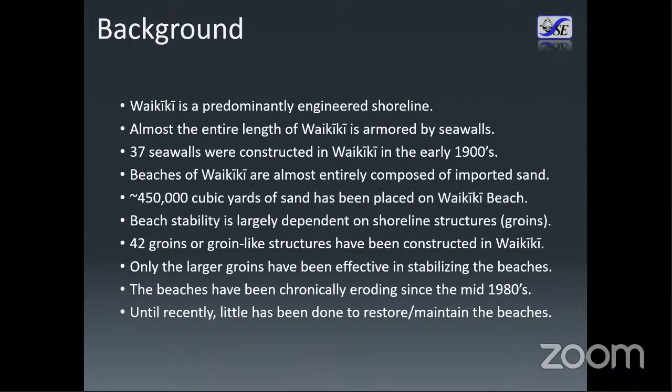Unfortunately, for the past 35 years or so, the beaches have mostly been experiencing chronic erosion, and until recently, just in the past 10 years or so, very little was being done to restore and maintain the beaches.

So this figure you see here is an overview slide of the beach sectors in Waikiki. The entire shoreline spans over 10,000 linear feet, or 2 miles of shoreline. And again, the individual sectors are compartmentalized by a series of groins to create 8 distinct littoral cells.

So beginning at the west end of the shoreline, let me use my cursor here, at the west end we begin with what we refer to as the Duke Kahanamoku beach sector. It spans approximately 1,100 feet of shoreline, extending from a rock rubble mound breakwater on the left, over to the Hilton Pier, which includes a groin that extends back into the beach.

That leads us to proceeding east to the Fort DeRussy beach sector, which extends from the Hilton Pier and groin about 1,680 feet to the Fort DeRussy outfall groin that's located right here.

The next cell to the east is referred to as the Halekulani beach sector, consisting of about 1,450 feet of shoreline that extends from the Fort DeRussy outfall groin on the west end to the Royal Hawaiian groin on the east end.

Continuing to the east is the Royal Hawaiian beach sector. Item D on the figure consists of approximately 1,730 feet of shoreline that extends from the Royal Hawaiian groin at the west end to the Ewa, or west groin, at Kuhio Beach Park.

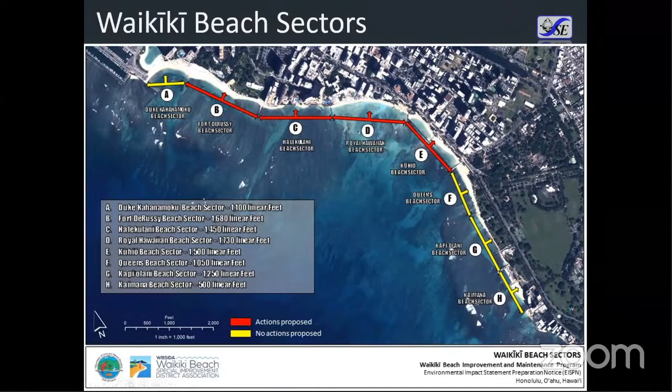As I previously mentioned, the beaches of Waikiki have been chronically eroding since the mid-1980s. In addition to the associated beach narrowing and beach loss, the erosion has caused a variety of other negative effects in Waikiki. The erosion and flooding has limited shoreline access, caused structural damage, and contributed to the overall deterioration of shoreline conditions along Waikiki.

The economic impacts of beach loss in Waikiki are tremendous and really can't be overstated. Without beach maintenance and improvements, the beaches of Waikiki could be completely lost to erosion by mid-century or sooner. Complete erosion of Waikiki Beach could result in an annual loss of over $2 billion in annual visitor expenditures, based on a study conducted in 2018.

So here are just a few photographs. I hope they're large enough for you folks to see that highlight some of the issues and the need for beach improvements and maintenance in Waikiki.

Photograph A is of the beach walkway in the Fort DeRussy beach sector. Erosion and sediment loss has caused significant beach narrowing at the east end of Fort DeRussy Beach. The beach walkway, constructed on top of a seawall built in 1916 that spans the entire length of the shoreline, is frequently overtopped by waves, particularly during high tide and high surf events. Periodic maintenance is required to push the sand back onto the beach.

In consultation with the Waikiki Beach Community Advisory Committee, it was determined that the highest priorities for beach improvement and maintenance actions in Waikiki are, in order: the Royal Hawaiian Beach sector, the Kuhio Beach sector, Halekulani Beach sector, and Fort DeRussy Beach sector.

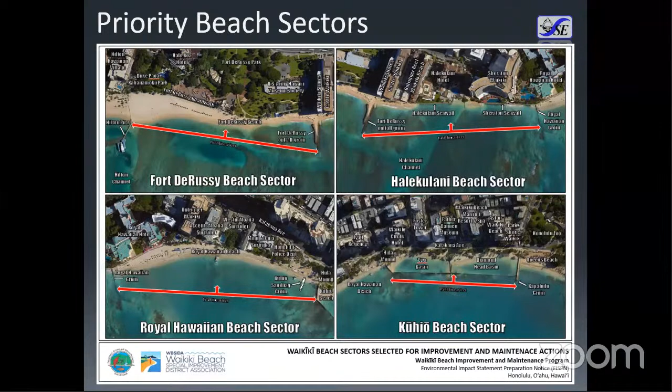The WBCAC also determined that of the options available to address these issues in these areas, beach restoration and maintenance were the preferred options.

The primary objectives of the proposed actions are to restore and improve Waikiki's public beaches, to increase beach stability through improvement and maintenance of shoreline structures, to provide safe access to and along the shoreline, and to increase resilience to coastal hazards and sea level rise.

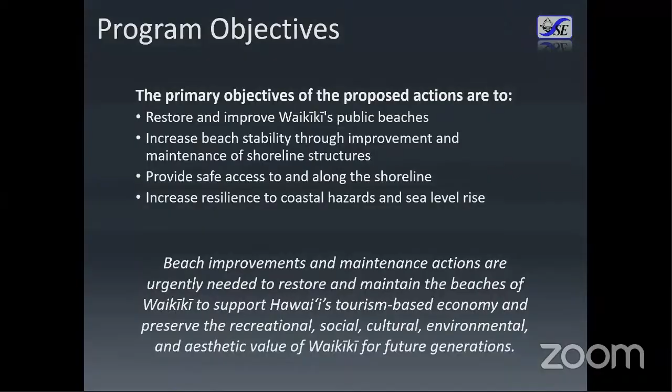The WBCAC also established criteria to guide the planning process for beach improvement and maintenance in Waikiki. The primary objectives of the program are to improve beach stability, improve lateral shoreline access, and increase resilience to sea level rise and coastal hazards.

The actions proposed are designed to accommodate sea level rise over the next 50 years and are also designed to be adaptable beyond that time. The actions would be implemented in phases with an emphasis on supporting the widest range of possible uses with the least amount of disruption.

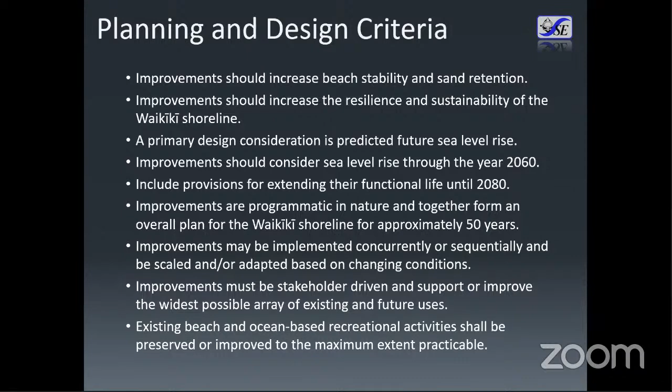I just want to go through a couple of slides to provide an overview of each of the beach sectors and highlight some of the issues and problems that we're trying to deal with through this program.

The Fort DeRussy Beach sector consists of approximately 1,680 feet of shoreline that extends from the Hilton Hawaiian Village Pier to the Fort DeRussy outfall groin.

Fort DeRussy is an entirely engineered shoreline. The entire shoreline is armored by a seawall constructed in 1916, at a time when there was no beach in this area. Subsequently, a lot of offshore dredging was done, some of it for military purposes. The beach itself was constructed in the early 1970s using a mixture of sand and crushed coral dredged from the offshore reef.

The primary problems in the Fort DeRussy Beach sector are chronic erosion and beach loss at the east end of the beach, wave overtopping along the Fort DeRussy Beach walkway, and overall general sand compaction throughout the entire beach, which is a byproduct of the use of crushed coral when they constructed the beach in the 70s.

The beach has historically eroded at a rate of about minus 0.4 feet per year, from 1927 to 2015. That analysis was conducted by the University of Hawaii Coastal Geology Group.

But beach erosion does not occur uniformly throughout this sector. The east end of the beach has been eroding at a rate of about 1.2 feet per year, whereas the west end of the beach has actually accreted at a rate of about 0.4 feet per year.

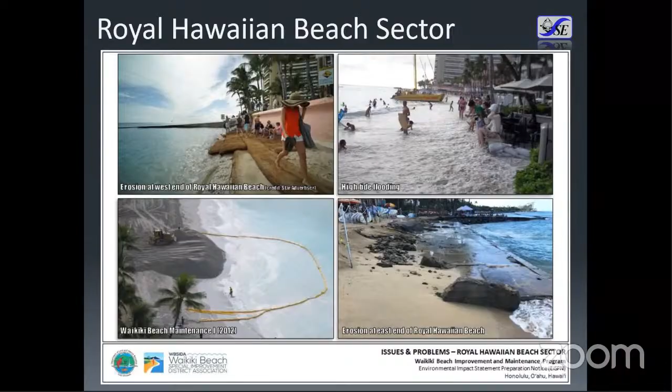The Kuhio Beach sector consists of about 1,500 feet of shoreline that extends from the Ewa groin at Kuhio Beach Park to the Kapahulu storm drain. Again, it's an entirely engineered shoreline. The seawalls were constructed along the entire length of Kalakaua Avenue in this area in the early 1900s. And then the beach itself and the breakwater system was constructed in the 1930s and 40s.

There have been various beach maintenance efforts in this area that occurred between about 1950 and the year 2000, the most recent being the Kuhio Beach Nourishment Project in 2006, when about 10,000 cubic yards of sand was recovered from offshore and placed on the beach. There really haven't been any major improvements since then, so over the past 15 years.

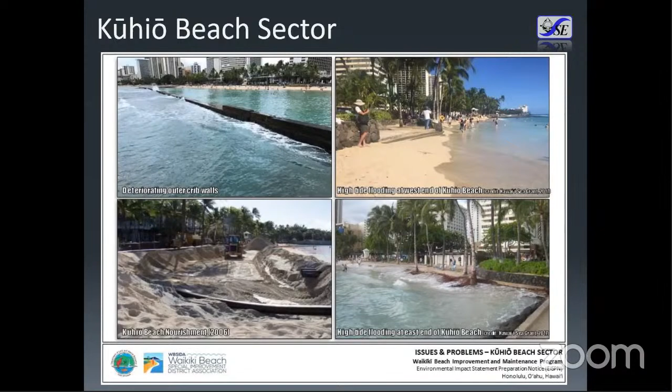The primary problems in the Kuhio Beach sector are beach narrowing, seaward slumping of the beach, seasonal beach erosion, lack of maintenance of existing structures, public safety hazards on the existing breakwater and groins, and beach narrowing in the Diamond Head Basin. There are also concerns about potential water quality issues within the swim basins.

So the Waikiki Beach Improvement and Maintenance Program consists of 4 individual projects or proposed actions.

In the Fort DeRussy sector, we're looking at doing beach maintenance, which would consist of sand backpassing. In the Halekulani Beach sector, we'd be looking at doing beach construction with stabilizing groins. In the Royal Hawaiian Beach sector, we would be doing continued beach nourishment as was done in 2012, and will be done again this coming, actually in 2021, in the next few months. And then in the Kuhio Beach sector, we'd be proposing to do a combination of beach nourishment with a segmented breakwater in the 'Ewa Basin and periodic beach maintenance in the Diamond Head Basin.

Collectively, these proposed actions will require approximately 115,000 cubic yards of sand from various sources in the vicinity of Waikiki.

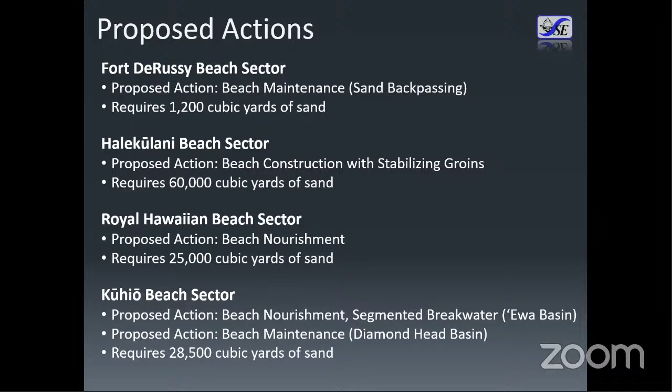The intention of the proposed actions is to improve beach width and stability while minimizing changes to the existing shoreline configuration. The exception is the proposed beach construction in the Halekulani Beach sector, where there's almost no dry beach today. The reason is that one of the primary objectives of this program is to improve lateral access along the shoreline. The proposed beach construction in the Halekulani sector would establish safe and contiguous lateral access along the entire Waikiki shoreline, essentially bridging the east and west ends of Waikiki, something that's really never been possible before.

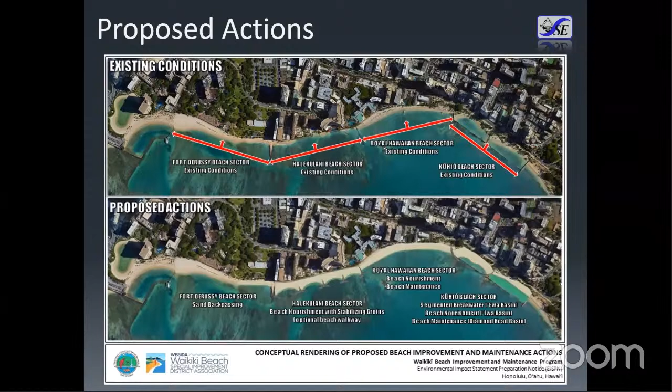In terms of potential sand sources, a key component of this program is the availability of sand that is beach compatible to support these nourishment, maintenance, and improvement efforts. We conducted offshore sand investigations in 2017, examining 6 offshore deposits, all within 7 miles of Waikiki. In total, the deposits cover about 180 acres and contain nearly 1.2 million cubic yards of sand.

The state of Hawaii has established guidelines to determine what sand can be used for beach nourishment purposes. Most of those requirements focus on grain size compatibility with the existing beach and the percentage of fine materials contained within the borrow sand.

In terms of applicability, the Reef Runway deposit has a very large volume of sand, an estimated 200,000 cubic yards. Unfortunately, that sand does not comply with the state of Hawaii requirements for use in Waikiki.

The sand deposit at Ala Moana contains about 190,000 cubic yards and could potentially be used to support beach nourishment projects in the Halekulani and Kuhio beach sectors. The Hilton deposit contains about 45,000 cubic yards and could potentially support projects in Fort DeRussy, Halekulani, and Kuhio beach sectors.

The Halekulani Channel contains a very large volume of sand, approximately 580,000 cubic yards. It gets progressively finer offshore, so we might be limited in how much sand we could use. It would likely need to be taken from the inner channel, and it would be most suitable for beach nourishment purposes in the Halekulani beach sector.

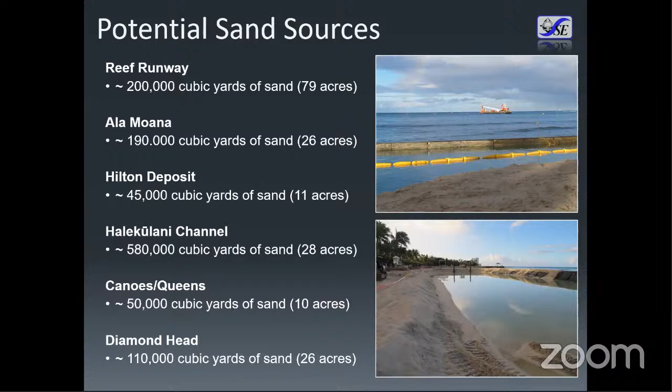The last deposit we investigated was off of Diamond Head, containing about 110,000 cubic yards of sand. It could potentially be used to support beach nourishment projects in all 4 of the beach sectors, but it is further away from the project site.

There are various methods we can use to recover offshore sand and transport it to the shoreline. Those methods include a hydraulic suction dredge, a clamshell dredge, an ROV submersible dredge or sub dredge, and a diver-operated dredge, which is a very small-scale, nimble system that can be moved around to recover relatively small volumes of sand without as much mobilization of large equipment and barges.

Each of these options has inherent advantages and disadvantages, and one may not be appropriate depending on the scale of the project. We will be investigating these options further and discussing them in more detail in the draft EIS.

So the proposed action for the Fort DeRussy beach sector is sand backpassing. The plan would be to backpass about 1,200 cubic yards of sand from the accreted area at the west end of Fort DeRussy Beach and transport it to the east end of the beach, where we're dealing with chronic erosion issues next to the Fort DeRussy outfall groin.

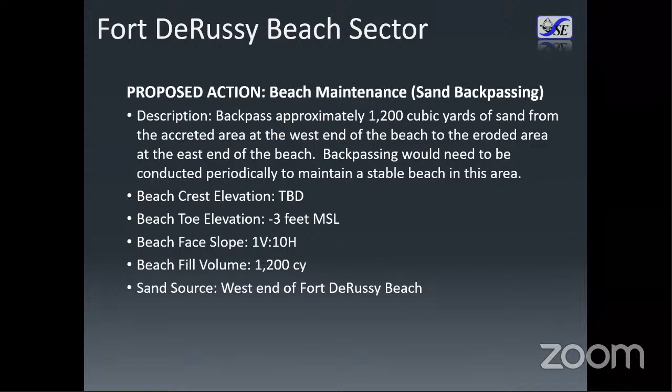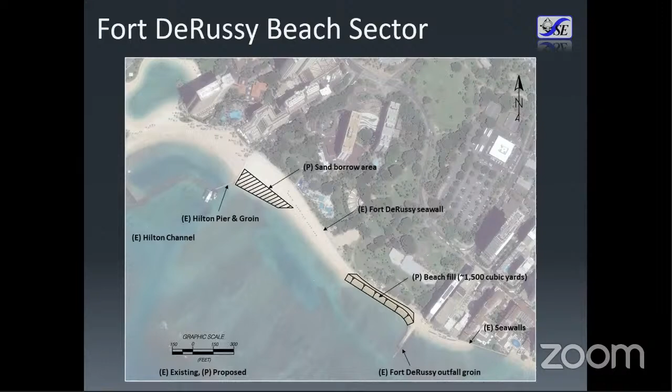A disadvantage is that the volume of sand to be backpassed is relatively small, so periodic backpassing would be required. For the Halekulani beach sector, we're proposing beach construction with stabilizing groins, designed to stabilize the sand within the cells between the groins. There is an option of including a beach walkway that would be ADA accessible to provide safe lateral access along the entire shoreline, but we're still investigating that option and looking for feedback.

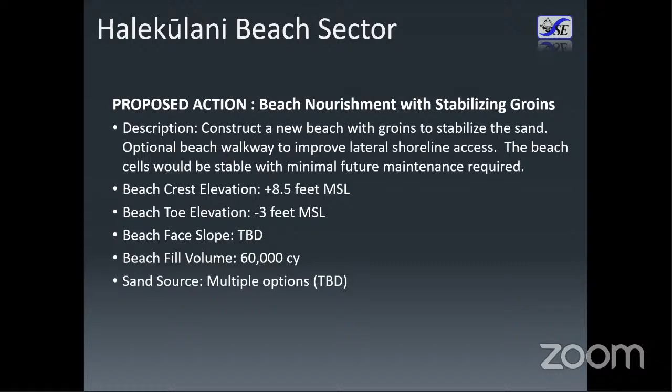This project would require about 60,000 cubic yards of sand. This is the conceptual layout for the proposed beach construction. It would consist of a series of 3 T-head groins that would be installed, and the existing Fort DeRussy outfall groin and Royal Hawaiian groin would be modified to help stabilize the sand in each of the groin cells at either end of the shoreline.

The sand would be recovered from offshore deposits and placed along the shoreline to achieve the design profile. An advantage of this option is the beach cells would be very stable. The groins are very durable and require very little maintenance.

A disadvantage of this option is obviously the larger scale, and it would fundamentally change the existing configuration of the shoreline. However, due to the lack of dry beach and limited public access in this area, beach construction was determined to be the preferred alternative.

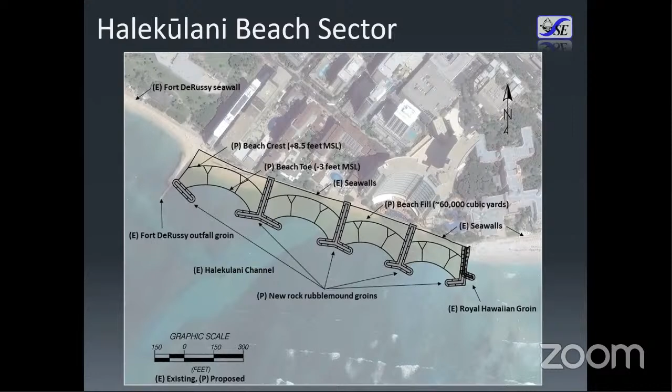The Royal Hawaiian beach sector's proposed action is continued beach nourishment, as was done in 2012 and will be done again this year. Those beach nourishment efforts require somewhere between 20 and 30,000 cubic yards of sand, depending on conditions at the time.

Here is a conceptual layout of what that would look like. The sand would be recovered from the Canoes Queens offshore deposit and brought to the beach, dewatered, and taken down the beach to be placed. No structural modifications or new structures are proposed for this option. The project would essentially mimic what was done in 2012 and what will be done again this year.

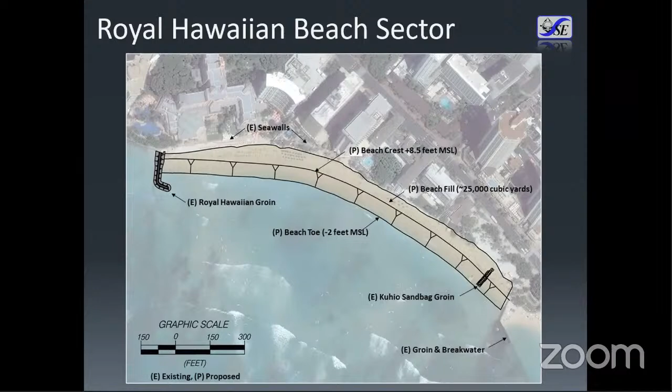The advantage of this option is that it will increase the recreational dry beach area and improve lateral shoreline access, particularly during high tides and high surf events. The disadvantage is that without stabilizing structures, we would anticipate that the beach would continue to erode, so periodic renourishment would be required.

We have 2 proposed actions in the Kuhio Beach sector. The first is for the Ewa Basin, the West Swim Basin. That would consist of beach nourishment with a segmented breakwater. We would modify the existing breakwater to create a segmented breakwater that would control the wave climate within the basin, causing refraction that would help shape the plan form of the beach to maintain a stable beach profile.

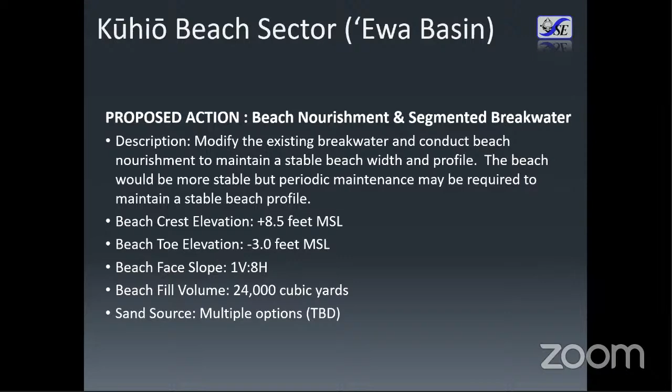That would require about 24,000 cubic yards of sand for the initial nourishment. Here's the conceptual layout for this action. The sand would again be recovered from offshore deposits and placed along the shoreline.

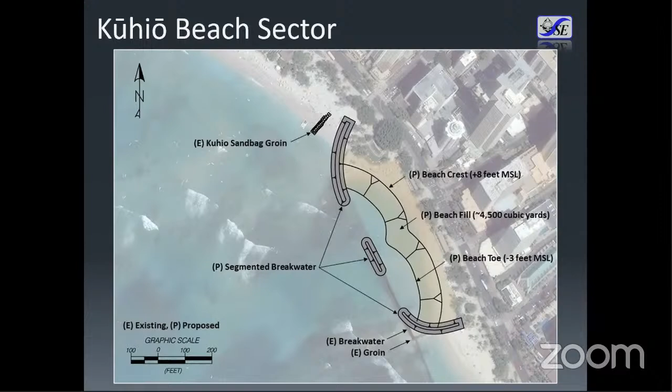An advantage of this option is it would increase recreational dry beach area, and the segmented breakwater would help create a wave climate within the basin that would maintain a more stable beach profile. The disadvantage is that we would need to modify the existing breakwater and groins in order for this to be effective.

The second proposed action in Kuhio is in the Diamond Head Basin, similar in scale to the action proposed at Fort DeRussy. In this case, it would be beach maintenance involving bringing sand from within the basin and putting it back up on the beach. Essentially, what's happened in the Diamond Head Basin is the sand from the dry beach, because of the low wave energy within the basin, is slumping down into the basin and making it more shallow.

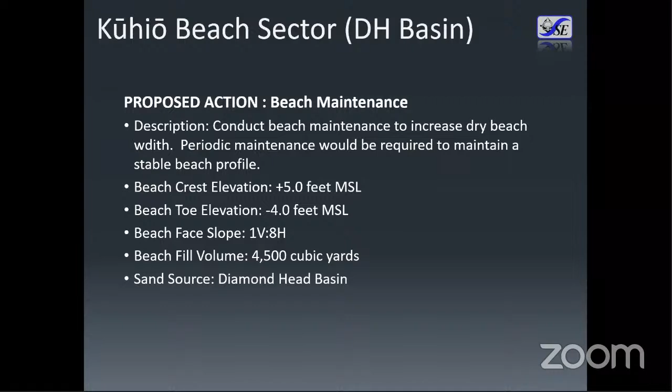We would propose to recover a nominal volume of sand, about 4,500 cubic yards, from within the basin and bring it back up onto the beach. This is what the conceptual layout looks like. There are no structural modifications or new structures being proposed for this action.

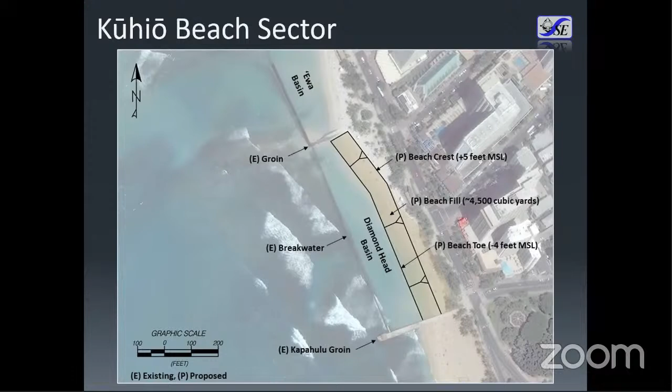The advantage is that it would increase recreational dry beach and improve lateral shoreline access, with the disadvantage being that the slumping would continue to occur because we're not altering the wave climate within the basin. So we would need to conduct periodic maintenance going forward.

An important component of the EIS process is evaluating reasonable alternatives to the proposed actions. We as a team recognize the uniqueness of Waikiki, and that there's no one-size-fits-all solution. However, without beach improvements and maintenance, sea level rise will likely result in total beach loss in many areas of Waikiki within this century, as beaches are squeezed between rising water levels and the seawalls lining almost the entire backshore. The impacts of beach loss in Waikiki cannot be overstated. It's our hope that through the EIS process we can achieve consensus on how to ensure our beaches remain sustainable and resilient for current and future generations.

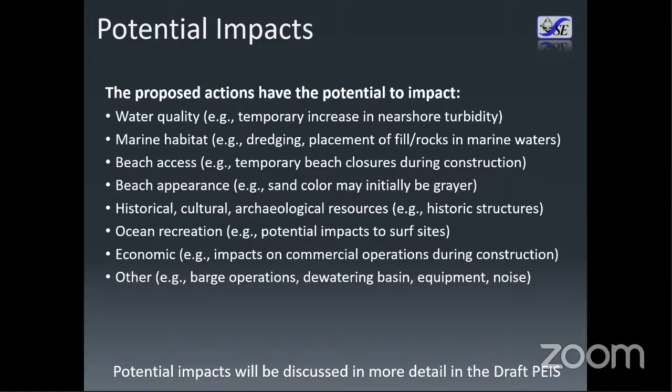In terms of potential impacts, the proposing agency DLNR determined that the proposed actions may have a significant effect and that an EIS is required. The purpose of the EISPN is not to assess all of those impacts, but to gather feedback from stakeholders and subject matter experts to ensure we fully understand and can consider the full range of potential impacts, and determine how to prevent or minimize them to the extent practicable. The list shown on the slide, while not exhaustive, covers some of the key impacts being evaluated in the draft PEIS.

All of the proposed actions will require some combination of federal, state, and city and county of Honolulu approvals. The approvals for each action will depend on the size, scope, nature, location, and potential impacts associated with the project. It's important to note that permit applications would not be submitted until after the final EIS is approved.